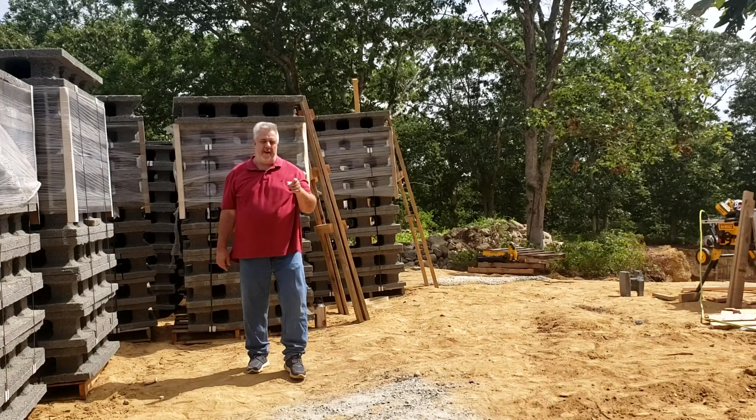Yes, we are starting a new project, so we're going to have probably a year's worth of videos coming live from this project. We're calling it the Vineyard Passive House. We're out here on Martha's Vineyard. The house that's going to be built here behind me is a certified passive house, and like any project, it starts with a really good foundation.

So we got some exciting stuff happening here, but before we get into talking about the foundation, let me introduce a good partner here. Farley is the builder of the project. He's also the owner of the home. So we have kind of the three-legged stool here between the two of us, and his wife, Daryl, of course. She makes a lot of decisions. We won't exclude her. But we have the design build team here.

We've been working on the house for a while, and as anything with Passive House or anything that both Farley and I do, we like to scrutinize everything. So in this particular project, we talked about starting with the foundation. Well, we have your typical concrete footing, but that's where the typical foundation ends.

We're using this product. You can see behind me, we have these stacks of material here. These are called the Perfect Block. They come from Arizona. Farley sourced them out for a number of reasons, and I'm going to let Farley talk about that. But they get trucked up here and then ferried out to the island, and then they get put in place. They're very similar to an ICF. It's a structural core that's reinforced with concrete. But tell us a little bit about the blocks, Farley.

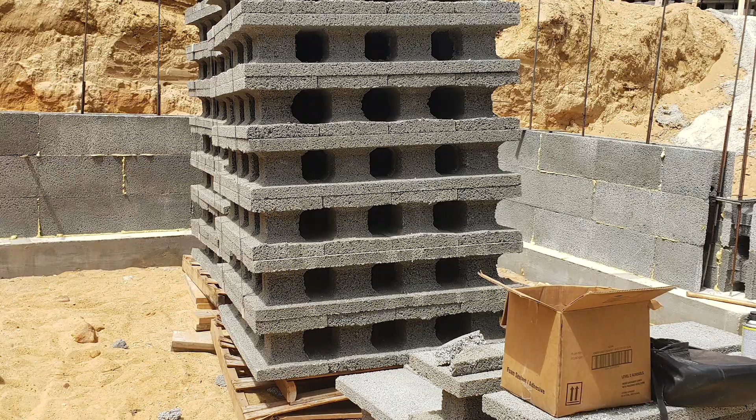Yeah, Steve. So these are what they refer to as an ICCF, insulated concrete composite form. They're made with 87% recycled EPS, and then they get put into a slurry with concrete and a binding agent, and then put into a mold to create this block. The dimensions of the block are 12 inches tall, 48 inches wide, and 10 inches in depth. And they have these cores that you can see. They're 6-inch cores, spaced 12 inches on center.

And we source this block for a number of reasons. Being on an island, everything here gets trucked in. We have a concrete plant, but all of their raw material needs to be trucked in from off island. And by using these blocks, we're able to eliminate 70% of what we would normally need for concrete.

Yeah, so that's a huge number right there. You go from the 10-inch concrete wall down to using 30% of the concrete that you put into the traditional formwork. But I think you touched on something that's really interesting that a lot of us don't have to overcome in building. When I'm back on the mainland, everything you do here, your commitment to build always has a strike against you in embodied energy, because everything has to get made somewhere else and be brought out here. Very few things—I mean, even your lumber, it's not cut on the island, it's not milled on the island and left here to be used. It's all brought out here. So your commitment to build from an environmental awareness is even more heightened than what we have to deal with in our struggles on the mainland.

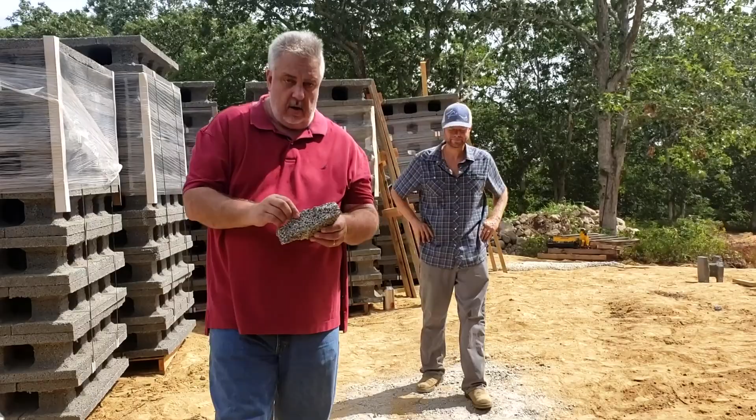And to reiterate a couple of those points, everything you see behind me is almost 90% recycled material. So it already had a life—they took it, they ground it up. I actually grabbed the piece here that I can bring up and show you. You can see there, it's EPS. This is nothing more than, you know, the coffee cup you drank out of this morning. It just gets reconstituted. It's got this kind of concrete-ish type binder there that holds it all together.

It's basically a chunk of insulation that wraps around the concrete that gets reinforced. The foundation gets its strength from the steel inside it and the core matrix that the blocks provide. So yeah, it's pretty cool stuff.

And this is fire retardant? Fire retardant, they actually refer to it as being fireproof. It's got a 4-hour fire rating, can resist up to 4,000 degrees. Another added benefit is that it's insect proof and rodent proof.

One of the concerns I've had about using a traditional ICF block is that it's used with virgin EPS foam, so no recycled content. It's highly susceptible to insect damage, and even going to great lengths of protecting the wall once it's formed up, there's still a risk factor there.

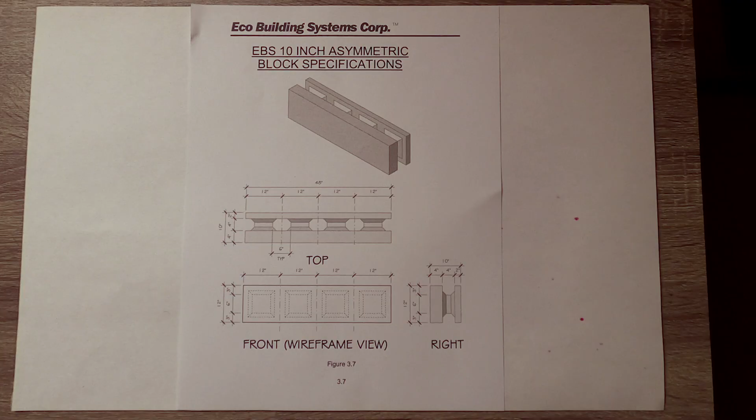So I printed out this one spec sheet here. It just gives you a quick overview of the block. You can see there, 48 inches, 10 inches wide, 12 inches.

This is actually the asymmetrical block. We have the symmetrical block out there. So we have two 2-inch layers.

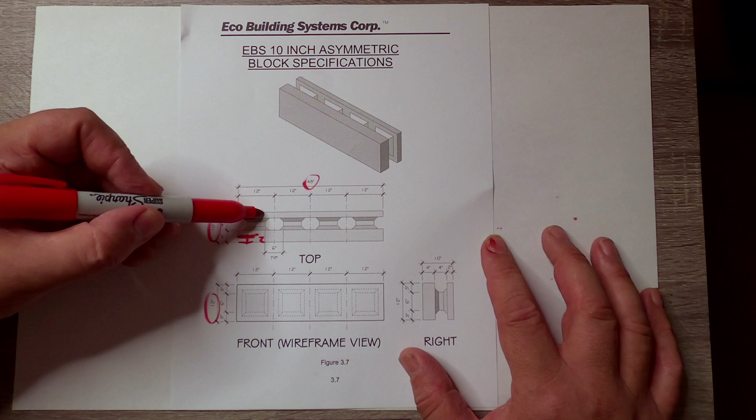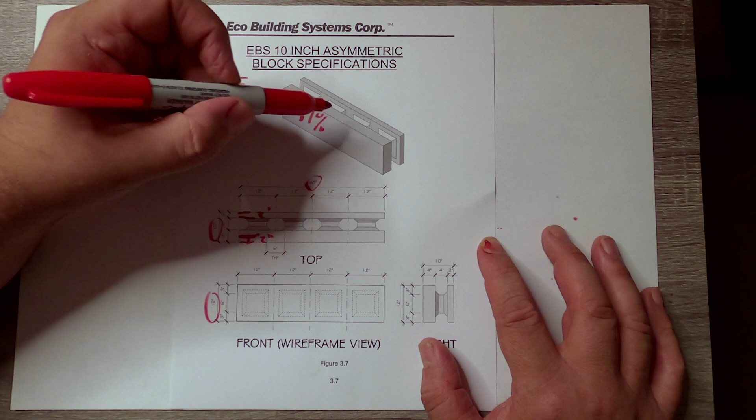But there's a lot of things that are pretty interesting about this block. One, it's not called an ICF, it's called an ICCF, and that stands for Insulated Concrete Composite Forms. The reason it's called a composite form is that 87% of this block is recycled material.

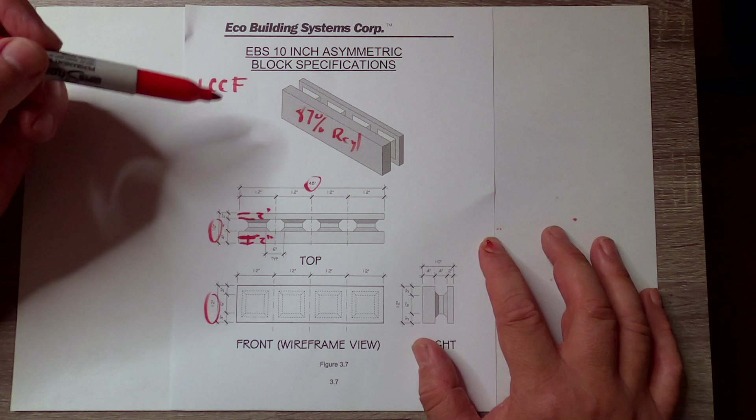This means this EPS was slated for the landfill or for trash. These companies bring their waste EPS to the Perfect Block or Eco Building Systems Corp, and then they reconstitute that recycled EPS with a binder, form these blocks, and ship them out to builders like Farley who want to build with them.

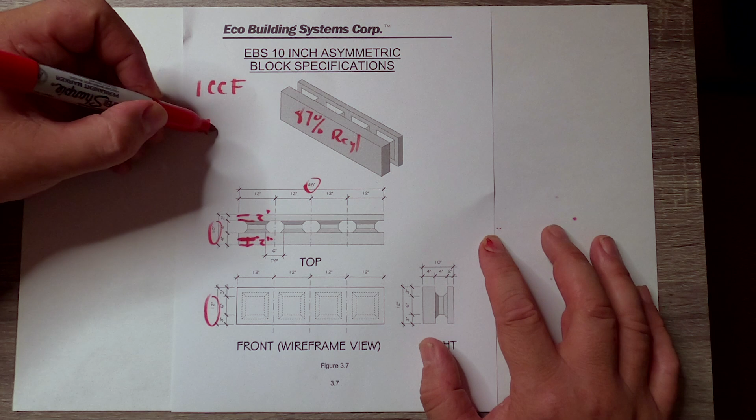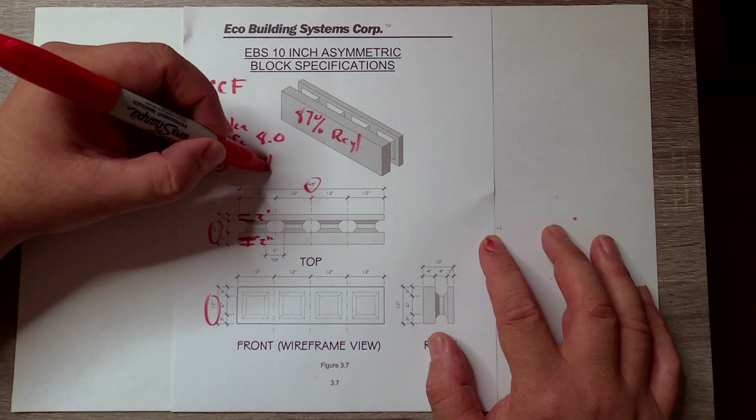But there's a lot of cool things about the block. One, we just spoke of, 87% recycled, but it's also what we call quake safe, rated to an 8.0. Given the right reinforcement schedule, you can build a pretty solid building here. It's also rated for a 250 mile per hour wind, which is a pretty hefty hurricane that it can tolerate, again with the right reinforcing schedule.

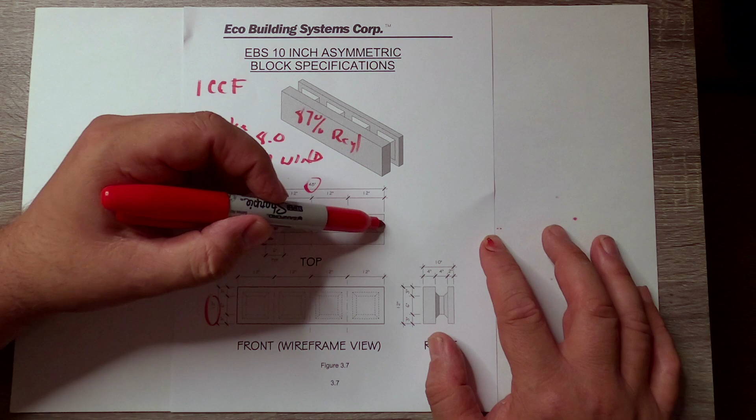The cool thing about this block is you have the 3 cores, 12 inches on center. Ours called for number 4 bars every 24 inches, but you could certainly make this a stiffer wall by adding reinforcing to each of those vertical courses. And the horizontal courses likewise had number 4 bars every 24 inches, and we could increase those to get the numbers working for us.

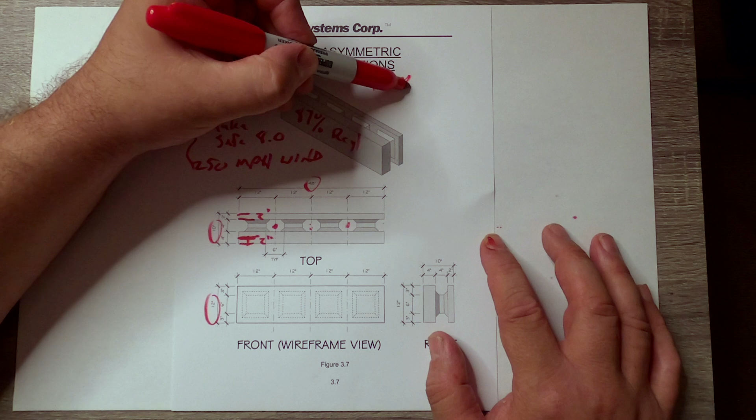But a couple other things: one, these are 100% pest free, meaning animals don't like to chew them, they don't want to live in them, they don't care about them. It is 100% mold free, because there's no organic material there to sustain mold growth.

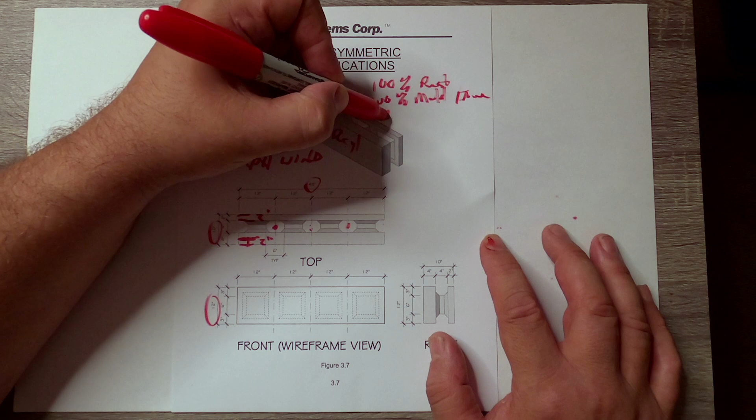They are 100% termite free. So all of you living in those termite infested areas, guess what? We got a solution for you, the Perfect Block.

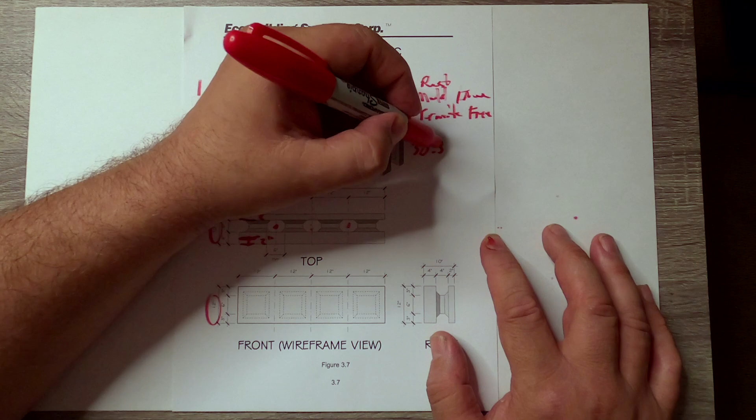A couple other things. We talked about the size. The weight of these blocks, you heard Farley say they're about 40 pounds, but depending on the size, they range from about 30 to 50 pounds. So they're big enough where one person can handle them on their own, but 2 can do it really successfully and lay them up pretty quick.

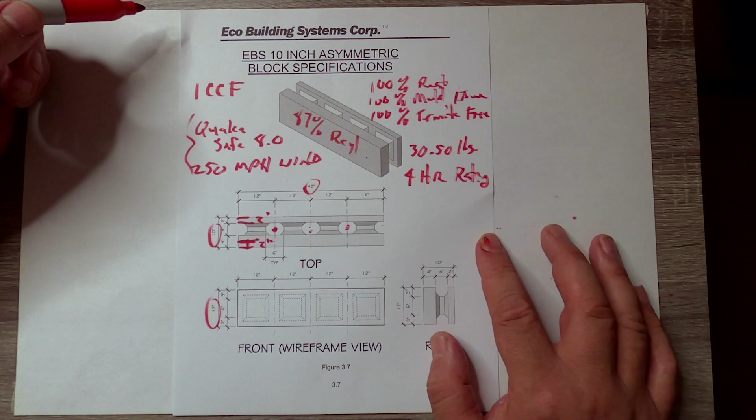The block itself has a 4-hour fire rating when you pour the concrete in there. That's about as stiff a fire rating as you'll ever need. The blocks also don't ignite, so you can't get them on fire. So if you're in areas where you have forest fires and brush fires, the Perfect Block might be a really good answer for that.

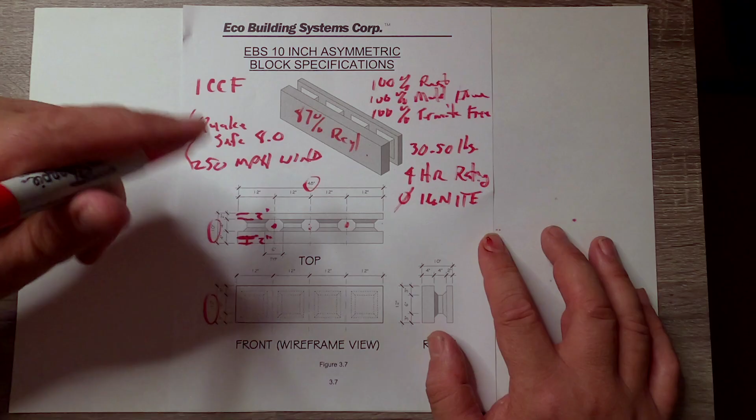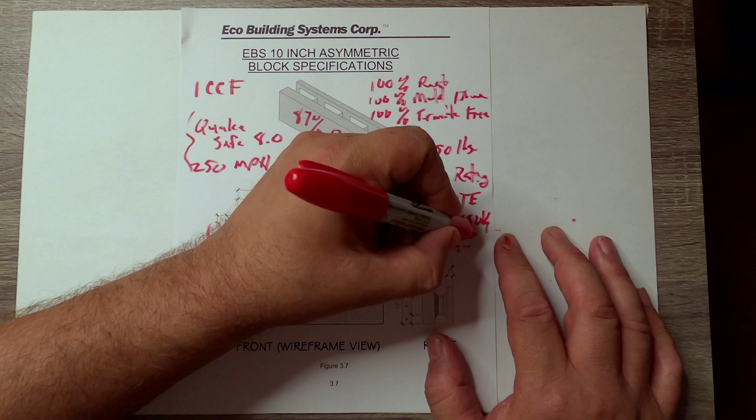There is 0 off-gassing. So these blocks, after they're made and sent out to the job site, are pretty much inert, nothing there. And there is 0 UV degradation — UV doesn't kill them.

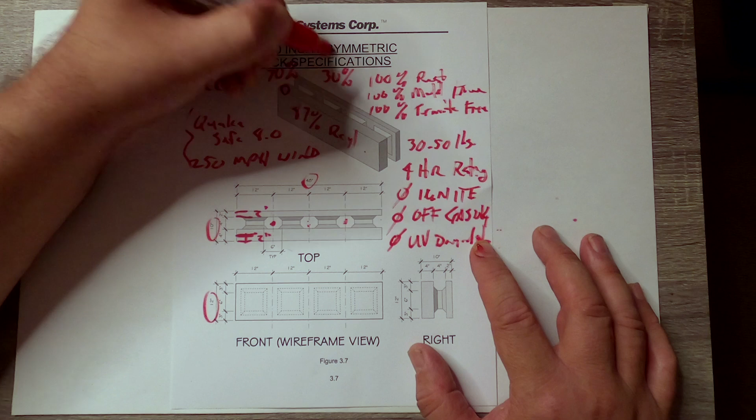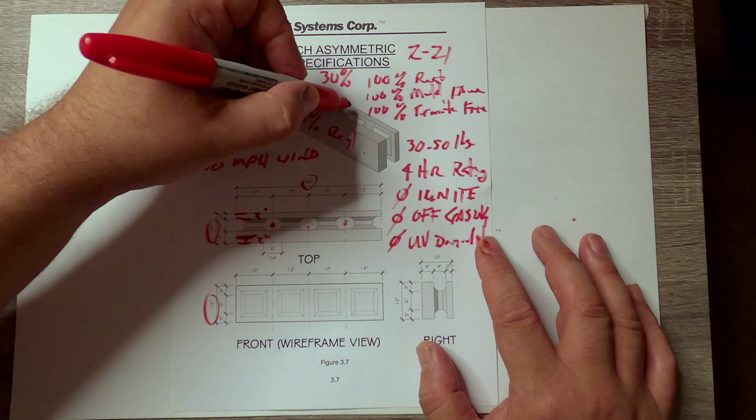Now, one of the coolest things about this is that the block, by volume, takes up about 70% of the volume, which yields a requirement of about 30% concrete. Imagine being able to build a foundation wall with roughly a third, less than a third, of the concrete required for a typical 10-inch foundation wall. And I get roughly about an R21 across the wall here. So not a bad deal. I mean, they labeled it the Perfect Block, not me, but man, they are pretty darn close to solving the world's problems with one block.

Let's take a look here. I also cut out a quick building section out of the set of drawings for us to take a quick look at.

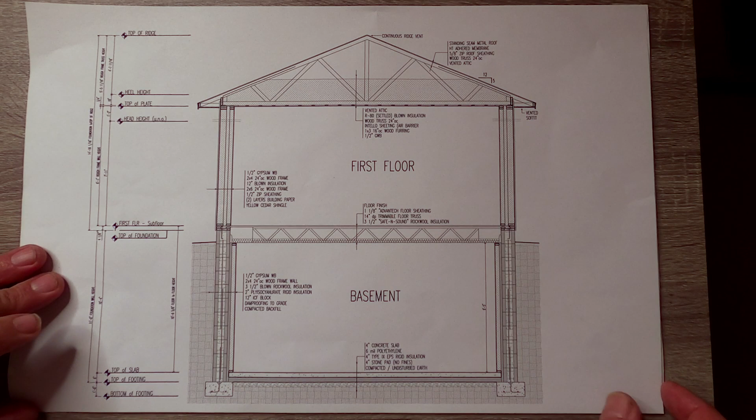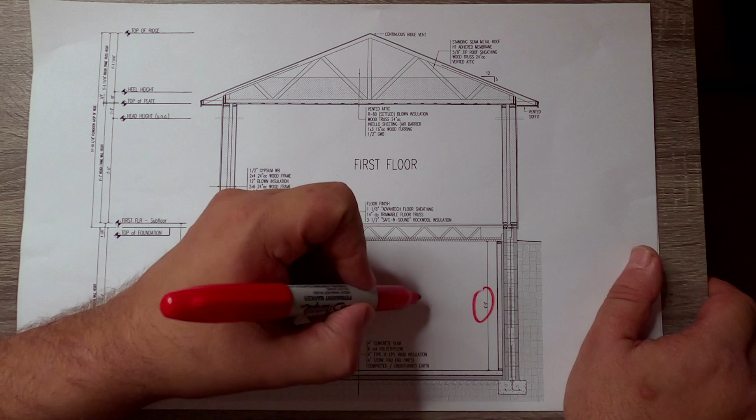You can see here we have our 11 courses that go down, and those 11 courses are 1 foot increments, so we get basically 11 courses, 11 feet. When you subtract the 14 inches in the mud sill, the floor joist, and the 8 inches here, we yield about a 9 foot, 5 inch basement ceiling height.

So that's pretty darn good. Now the beauty of that is we could have added another course or two, and that 9 foot 5 could have gone to 10.5 or 11.5, or we could have taken a block or two out and dropped that 9.5 down to 8.5 or 7.5, or you could do 3 or 4 courses and have a 3 foot, 4 foot crawl space.

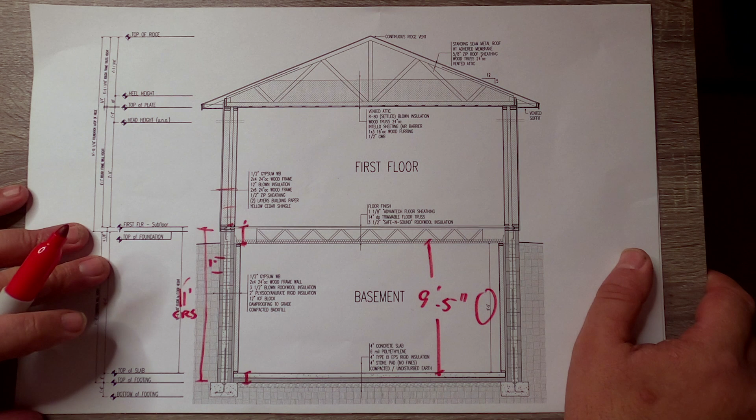Remember, it's termite free and already insulated. Get down in the southeast where you have a bunch of termites, you're looking for an insulated layup. Down there they use concrete block. When you saw this in the video, it very much looks like just an oversized concrete block, lays up the same way. You don't have to mix the mortar, which means you don't need water on the site. So if you're in one of those remote sites, you don't have the requirement of having water. It's just the blocks with that DuPont adhesive sealant.

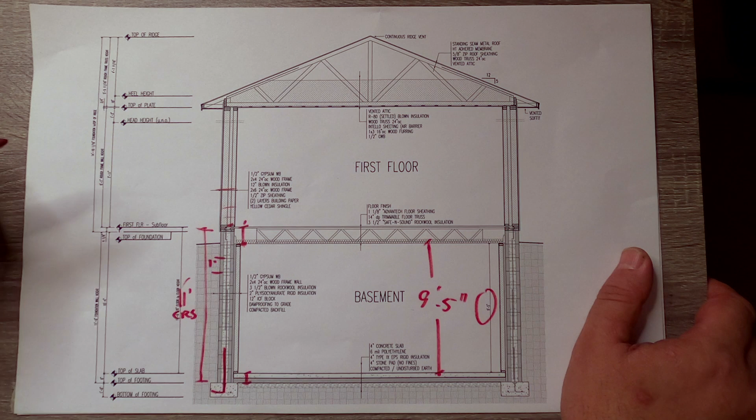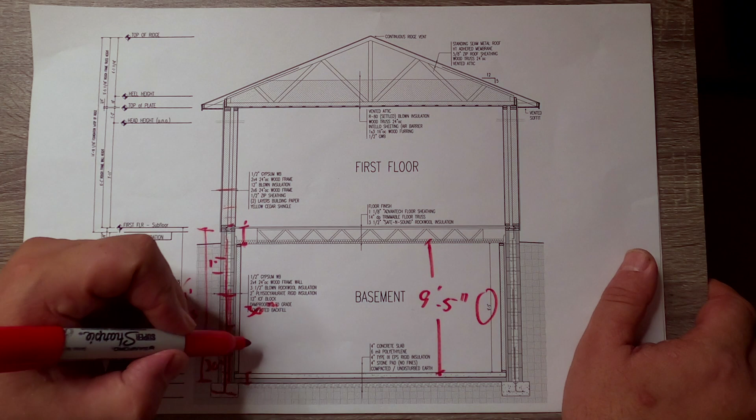And the reinforcing schedule is probably damn near the same as a reinforcing schedule for CMU block, right? So here we have that footer bar, and we alternate those - every other one goes in the opposite direction. Then we have the starter bar, goes down to the footing, and those get tied together. Remember, our spec on that was 30 inches. And then we have our finish bar, which comes down and connects to the starter bar, and that gets lapped at 30 inches. So we have the 3 bars in that 11 foot height. These are all number 4 bars. For those of you that don't understand reinforcing, number 4 bars - reinforcing bars are measured in an eighth. So number 4 bars, 4/8, are a 1/2 inch bar.

And there you have it. One of the last things we'll talk about - I think one of the coolest things about using this block, and a big reason why we used it.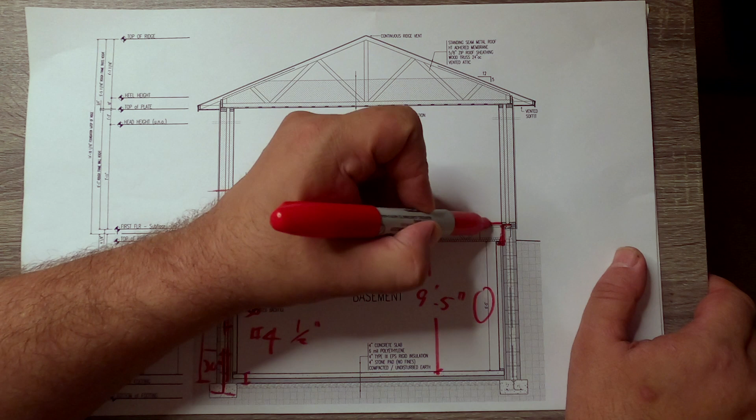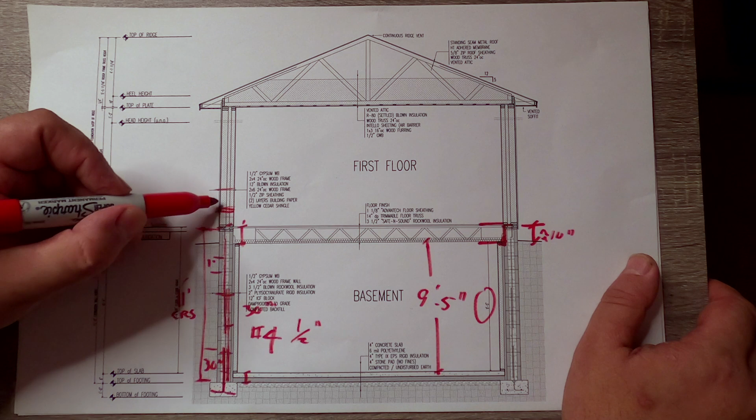We're putting joist hangers and we're going to hang our floor joist inside that block. So what does that mean? It means the proximity of the floor to the finished grade is somewhere around 10 inches. It's a lot tighter than that typical 21, 24 inches you see by the time you finish the foundation wall. You put the 14-inch floor joist, the subfloor, the 10 inches here, the 14 there, and subfloor. Next thing you know, you're at 24, 25 inches, and you have 3 or 4 steps down.

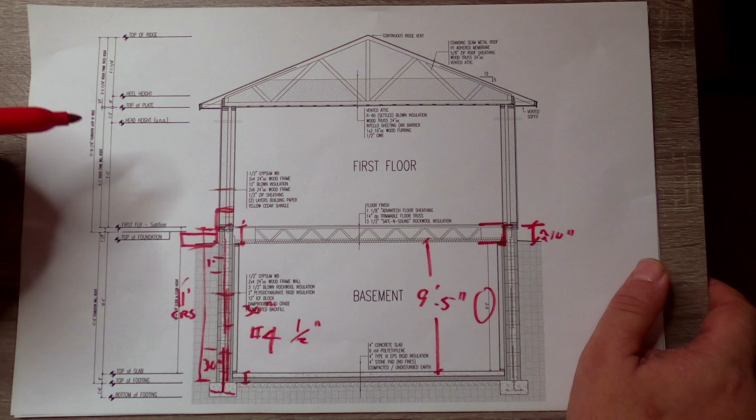Having that 10 inches, we can just come out here and do a nice granite landscape or patio or something and tie it right in there. So we're just that 1 step down, which was a huge part of the decision in using these blocks - being able to sink that floor down inside that opening and get us closer to the grade down there. That was a huge benefit.

Other than that, that's my intro to the perfect block. We're going to come back next time and talk about that detail in detail. We'll go back out to the job site and look at the block a little closer. We'll learn some of the little tricks and tips that Farley used in starting to use that block, and some of the lessons he learned in using it.